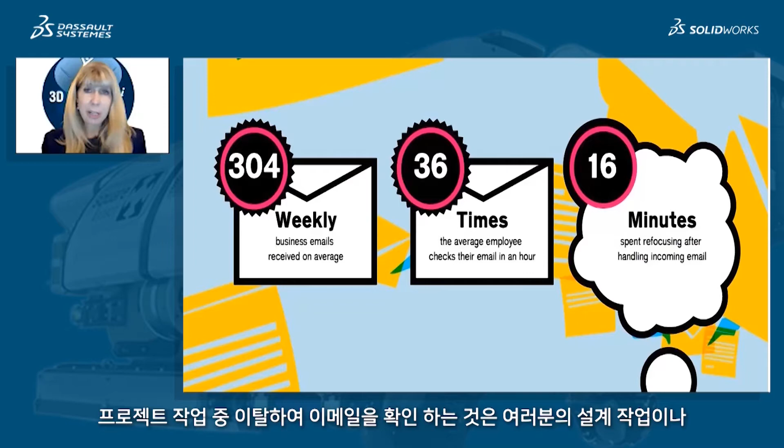Take a look at these statistics: it's estimated that the average business person gets a little over 300 business emails a week, and checks their email about 36 times an hour. That's terribly disruptive. But what's even more disruptive is that it takes 16 minutes after looking at your email to refocus on your project. So moving away from your project to check email is going to slow down the design process and the product development process.

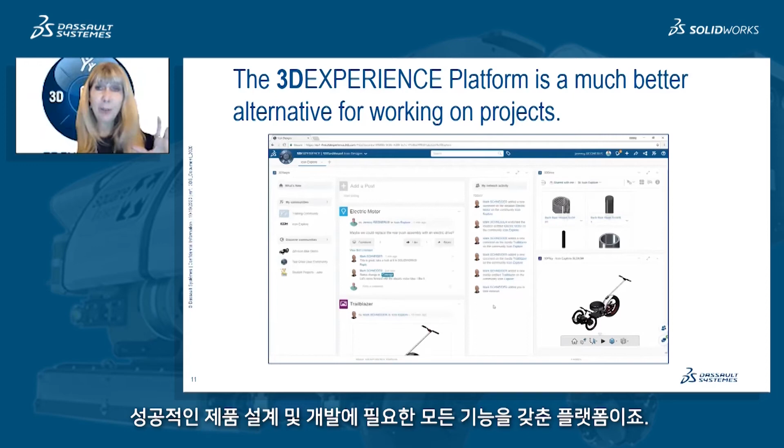It's very disruptive, and that's why we like to talk about the 3DEXPERIENCE platform. It's a much better alternative for working on your projects. It's all inclusive—everything is in one place. Here you can work on SOLIDWORKS, collaborate with other people, get notifications, and see tasks that you need to work on. It's really a one-stop shop for everything you need to be successful in product design and product development.

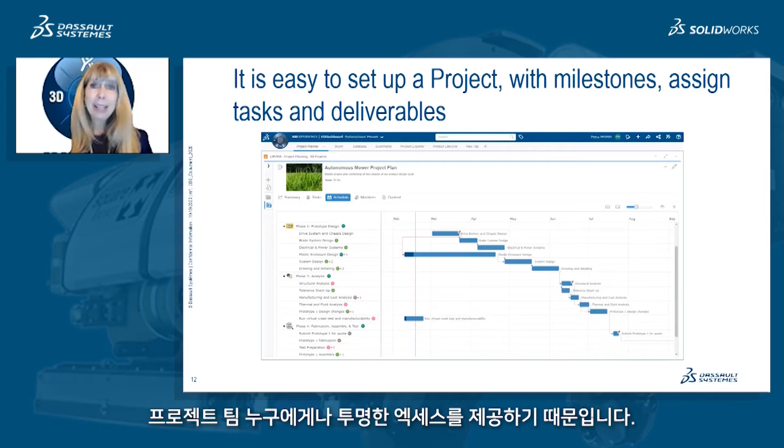You will also see that it's very simple to set up a project with milestones, tasks, and deliverables. There's a role called project planner where you simply say, this is the project. You set up the different milestones, assign tasks, and it helps keep track of everything. At any point, people can check the timeline to see what's been accomplished and where you are, giving transparent access to anybody on the project development team.

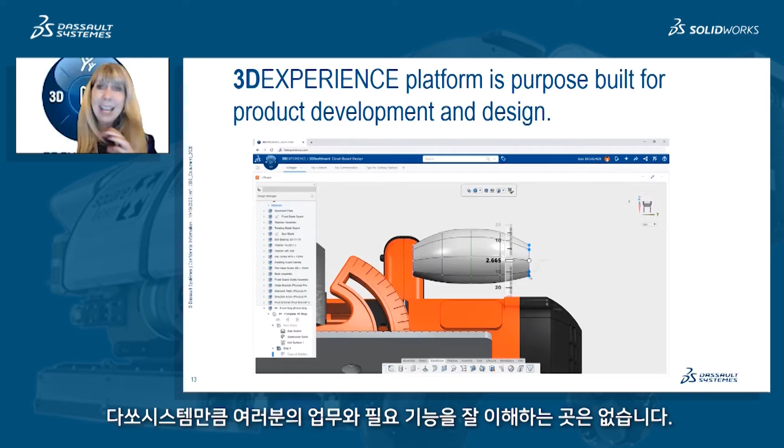The great thing about the 3DEXPERIENCE platform is it was intentionally built for product development and design by the people who bring you SOLIDWORKS. They understand what you do. No one understands what you do like they do.

It's also very easy to create dashboards with very powerful metrics. We do it all the time at Dassault Systemes. And one of the things I love is that we all use the 3DEXPERIENCE platform. Every single employee uses it. We log on in the morning, see if we have any notifications, see if we have any tasks we need to do. It's a great system for helping us collaborate and be very successful in projects.

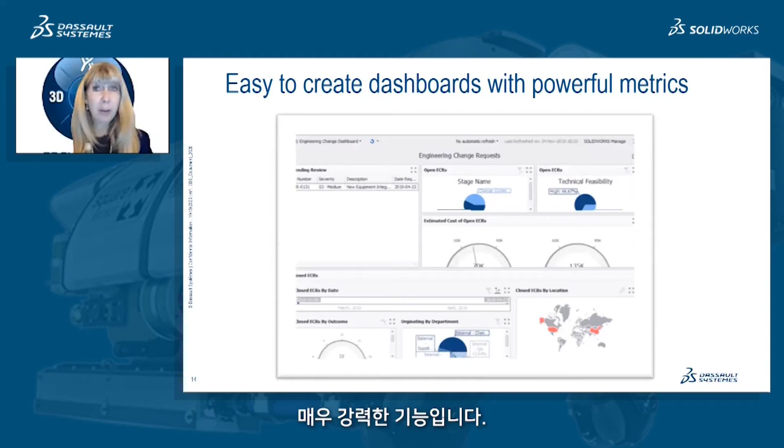You don't have to ask anybody else for the information. You can go look for yourself.

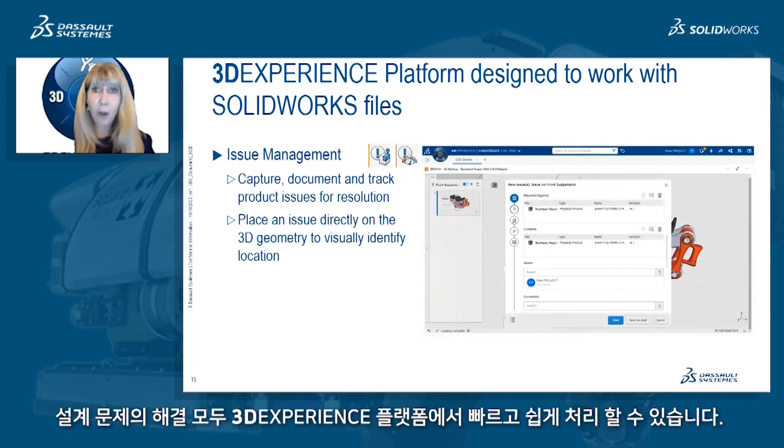The 3DEXPERIENCE platform is also designed to work with SOLIDWORKS files right there in the platform. Things like issue management are very easy to do. It's easy to capture, to document, and to track product issues and their resolution, and you'll find that design challenges get solved faster as a result of the 3DEXPERIENCE platform.

So just kind of a recap: there's transparent access for everybody who's a stakeholder. Anybody can take a look at where you are in a project. It's very easy to post your SOLIDWORKS data up there. You can review your tasks without leaving SOLIDWORKS, so you don't have that disruption you get with email. You can continue working and check in on tasks without that big disruption. You get obvious, friendly task reminders—we get them all the time at Dassault Systemes when working on projects—and it's just so much more efficient than email.

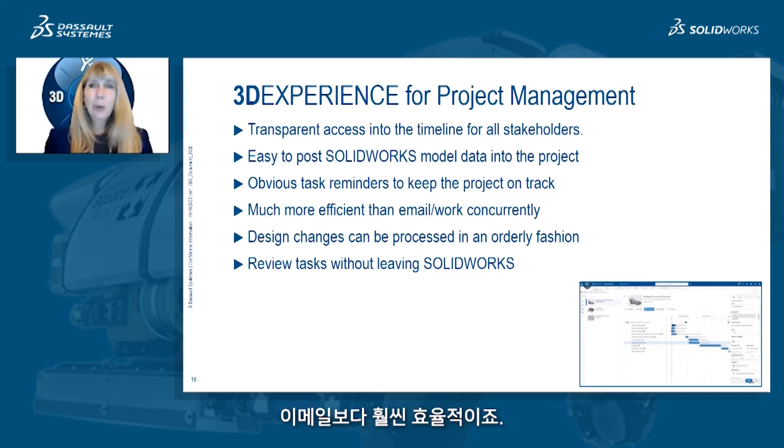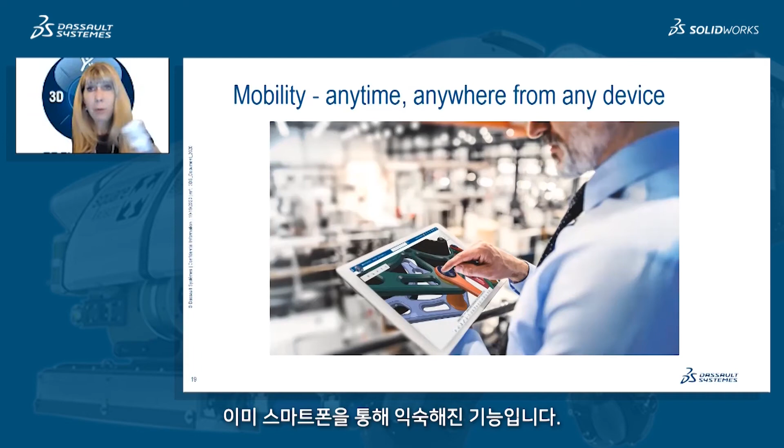Let's talk about mobility—the ability to access your data anytime, anywhere, from any device. We're very familiar with that with our smartphones. This is something that's very valuable to us.

A lot of us learned this when COVID hit and we were forced to work from home. How many of you had problems working with SOLIDWORKS from home? Was your design data on your computer in the office? Was it stored in the cloud? Or was it a problem for you?

I'll be talking later about what the 3DEXPERIENCE SOLIDWORKS offers. But if everybody had been on that, it would have been no problem to continue working on SOLIDWORKS. You don't have to worry about checking in your license and checking it out—it knows who you are. You can log on from anywhere and access SOLIDWORKS, as long as you've installed it on your local computer. And where's your data? It's in the cloud. You can get to it anytime, anywhere, from any device, which is very powerful.

Now I'm going to talk for just a second about a role called 3D Creator, and the product is actually called xDesign. You could call it either one, we'll know what you're talking about. This is CAD on the cloud.

Now I know you love your SOLIDWORKS, and we're not saying you shouldn't love your SOLIDWORKS, but if you ever decide you want a product that's completely on the cloud, this is what we're talking about. You could access it anytime, anywhere, on any device. It's very similar to SOLIDWORKS, with a lot of similar functionality. Some of the tools are exactly the same, and you'll feel at home in no time. But...

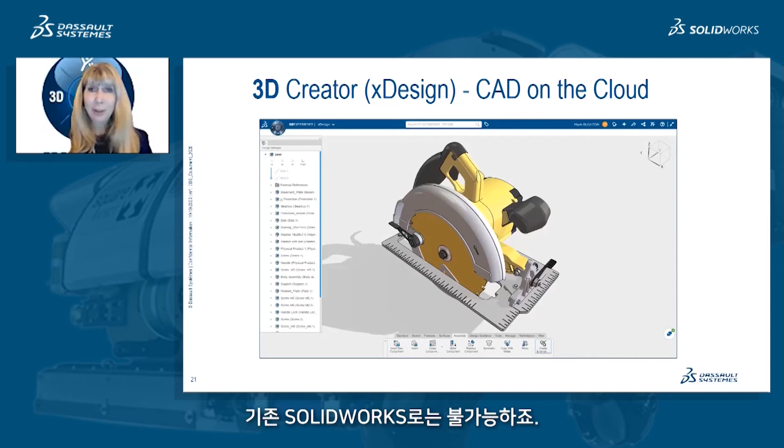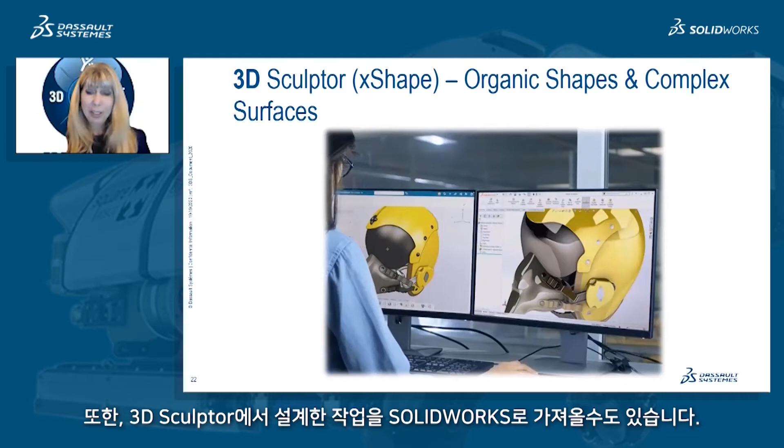Data management. This is where I think you're going to find the biggest excitement and the biggest power for you. We've all experienced pain in data management with SolidWorks, right? If you've been in a situation where you couldn't find a particular part, have you ever actually redrawn the part just because you couldn't find it?

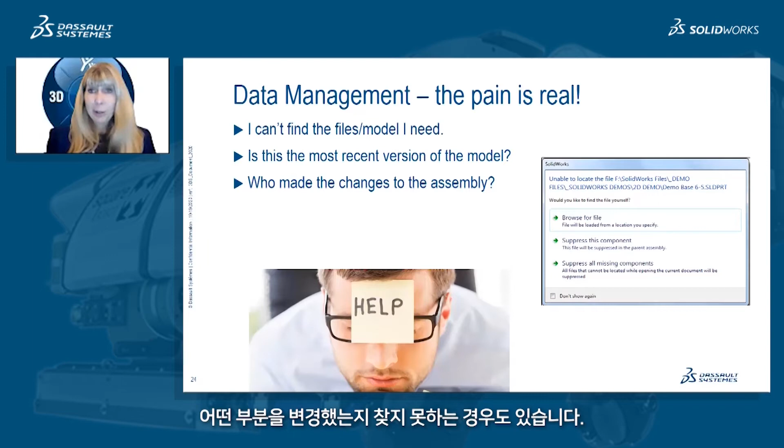Or you spent more time looking for it than you could have redrawn it, right? Ever worked on a file or a part only to find out it wasn't the most recent version? That's very frustrating. And ever wondered who made some changes to an assembly or to a part and didn't know who did it or what happened in there? You want to be able to track back to see what changes were made and by who. A good data management program lets you do that.

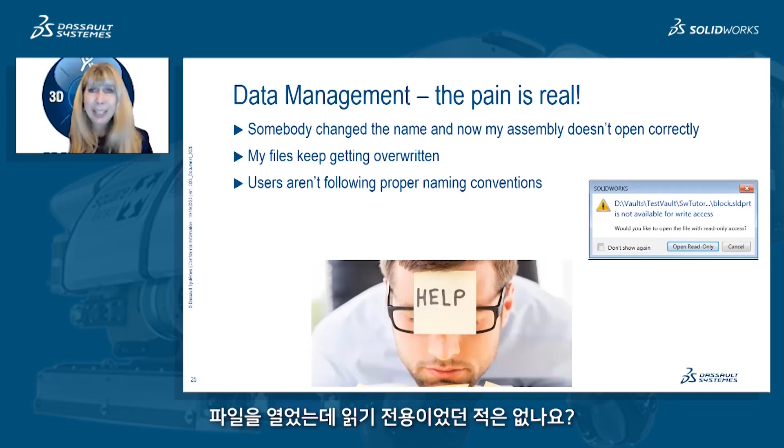And maybe your files keep getting overwritten, or maybe people are not following naming conventions. These are all problems when you don't have a good data management system. Have you opened a file and it said it was read-only, access only? These are all frustrations that we've all run into.

Maybe you've wanted to invest in data management, but you couldn't afford it because the servers were too expensive, or IT was going to be too complicated and too expensive. And of course, we all want our files to be safe and secure.

So data management in the cloud with the 3DEXPERIENCE platform is very, very powerful, absolutely safe and secure. It has the top credentials that you need to have trust in the fact that the data is secure. And the IT is either zero cost or very low cost, and the hardware cost, it's in the cloud, so you don't need to worry about what type of file server or what type of computer you have. You will always be working on the latest revision of a file. No worries there. You can track who has made changes to a part, to an assembly very easily.

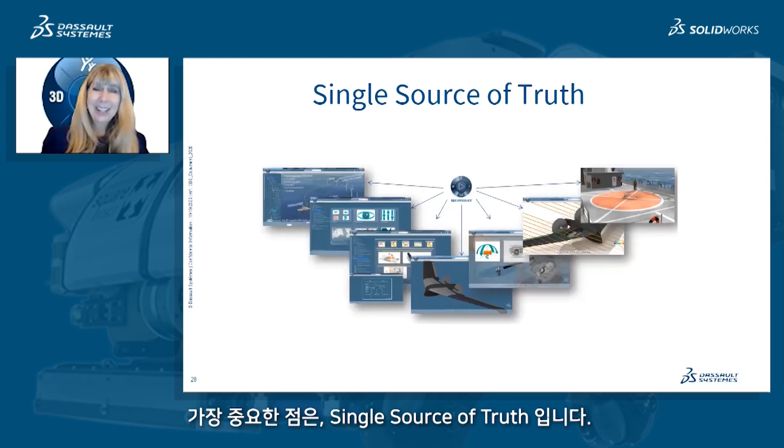And once again, when your data is in the cloud, you can access it from anywhere. You want to work from home, no problem. You want to work from the office, no problem. You want to work on the train, no problem. And I think the most important part is there's a single source of truth. You will always know that you are working on the right file, and that is very valuable.

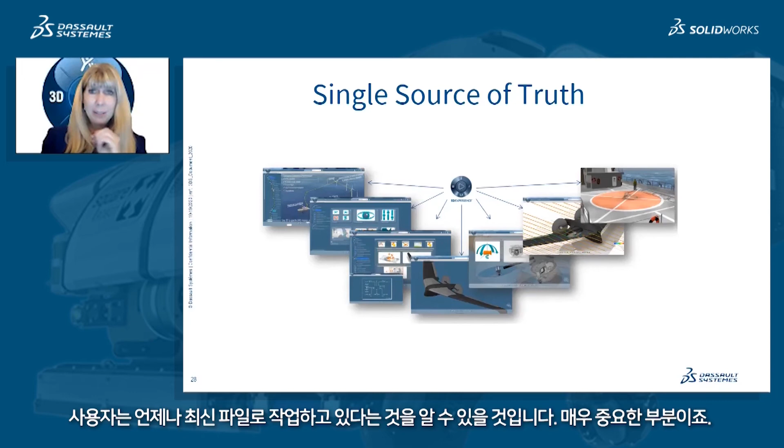Infinite computing. Now, I did tell you this was my personal favorite because I do think this is the most powerful aspect of the cloud. Simulation in the cloud is a perfect example.

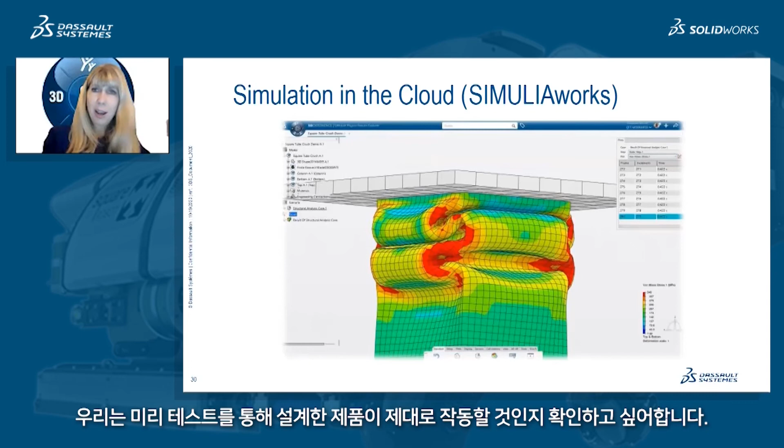We do have, part of our brand, a great product called SIMULIAworks that is simulation in the cloud. Simulation is something that can take hours to do properly, but in the cloud that is not the case. You want to test your products, make sure they're going to function, make sure they're quality products. You can do that easily with SIMULIAworks.

There's all different types of testing you can do with SIMULIAworks in the cloud in a very short period of time. And I think if you knew it wasn't going to take a lot of time, you would do a lot more testing and end up with a lot better products.

Some other benefits. We love it when a new release of SolidWorks comes out, but we don't like to install it on all the computers, right? You will find that there are more frequent updates that are very lightweight, and you barely even notice that your software is being updated. So you'll get access to new features throughout the year instead of all at one time. That's a great feature.

And if you've ever had issues trying to figure out how many licenses you have and what release or version you have, not a problem at all with the 3DEXPERIENCE platform. It's very easy to add or subtract licenses. Maybe you don't need as many licenses as you thought. Ultimately, I think you'll find that that will save you some money.

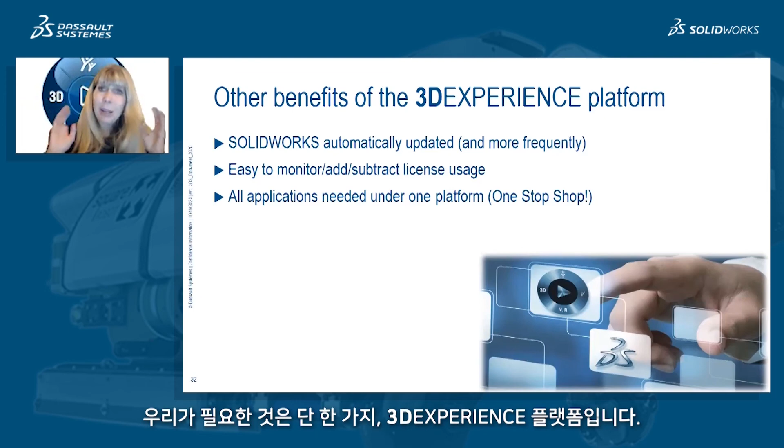And then I like to say that all the applications are under one platform. It's a one-stop shop. I don't need Dropbox and my email and Slack or Microsoft Teams or all these different platforms, all these different products. I just need one platform, the 3DEXPERIENCE platform.

So let's take a look at the 3DEXPERIENCE SOLIDWORKS offers. These are great offers. First of all, the prices are amazing. In some cases, they're basically the same prices if you just were to purchase SOLIDWORKS alone. That's one of the reasons I love this. Please note they all come with SOLIDWORKS that you install on your desktop.

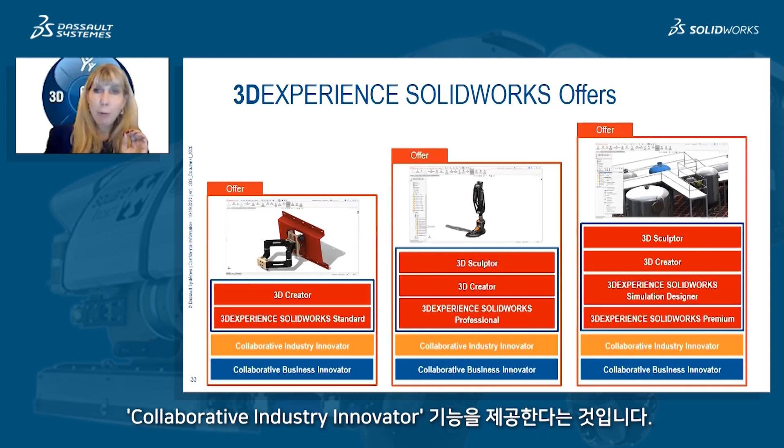In addition to that, they all come with Collaborative Business Innovator and Collaborative Industry Innovator. You're like, what is that, Lynn? You didn't talk about that at all. I did. Those are all the collaboration tools I talked about, the data management tools I talked about, and most of the project management tools I talked about. I just didn't label them. You don't need to know. You just need to know that you get all that great stuff.

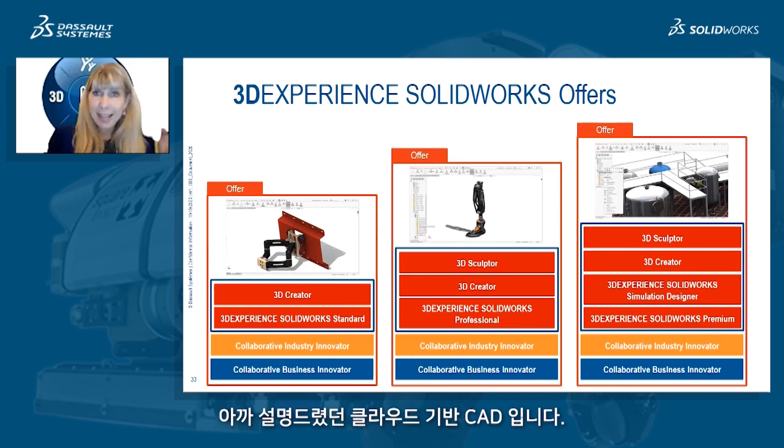So you get all the power of the 3DEXPERIENCE platform. In addition, you'll see the first offer, you get 3D Creator. What's that? Remember, CAD in the cloud. The second one, you also get 3D Sculptor, that sub-D surface modeler in the cloud. And then the last one, you also get Simulation Designer.

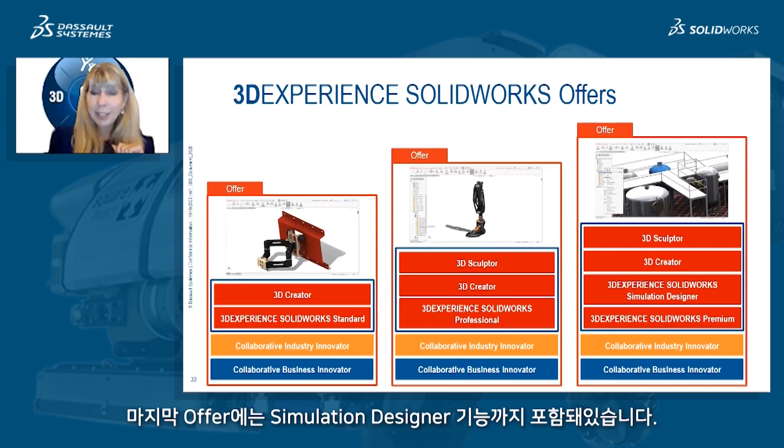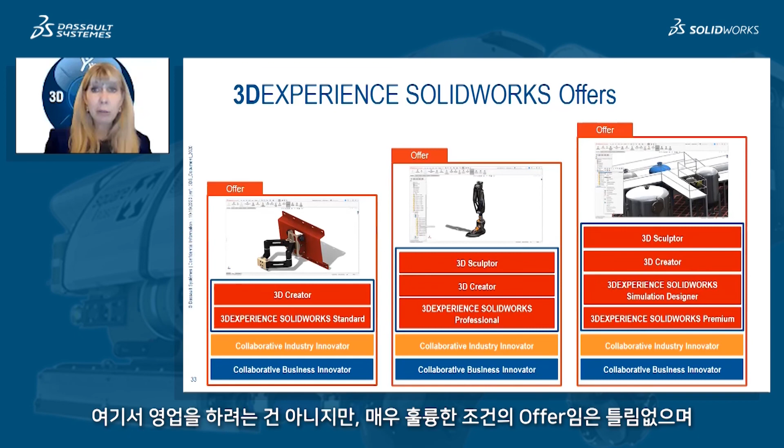Now, I'd like to tell you that's SOLIDWORKS, but it is not. It is a simulation for your desktop, not simulation in the cloud, but still fabulous. So those are the three offers. Ask about them, the pricing is amazing. I know I don't like to sound salesy, but these are three great deals that allow you to take your SOLIDWORKS to that next level, which is so, so important. Let's kick it up, take it where it needs to go next.

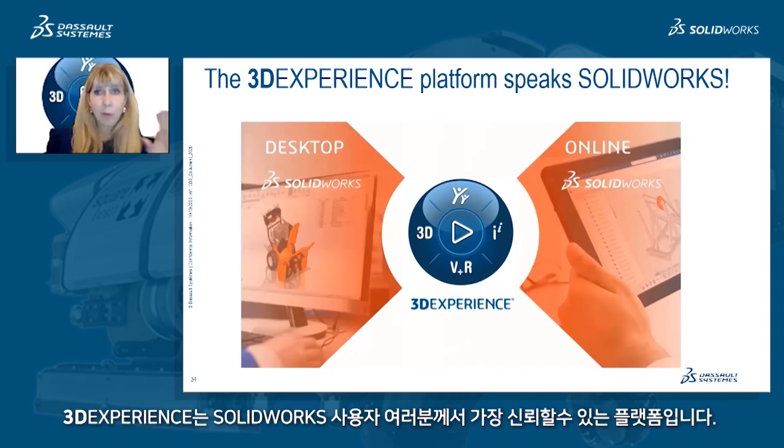So as I mentioned, the 3DEXPERIENCE platform speaks SOLIDWORKS. Slack doesn't speak SOLIDWORKS, Microsoft Teams doesn't speak SOLIDWORKS, Dropbox doesn't speak SOLIDWORKS. You can't trust your data with anything except for the 3DEXPERIENCE platform.

I always like to end my presentations with this phrase because everything I talked about requires some change. But I believe that the most dangerous phrase in the language is, we've always done it this way. What if you made some changes? What if you embraced the 3DEXPERIENCE platform and found that it was so much better? What if your everyday life was so much better? I believe it would be.